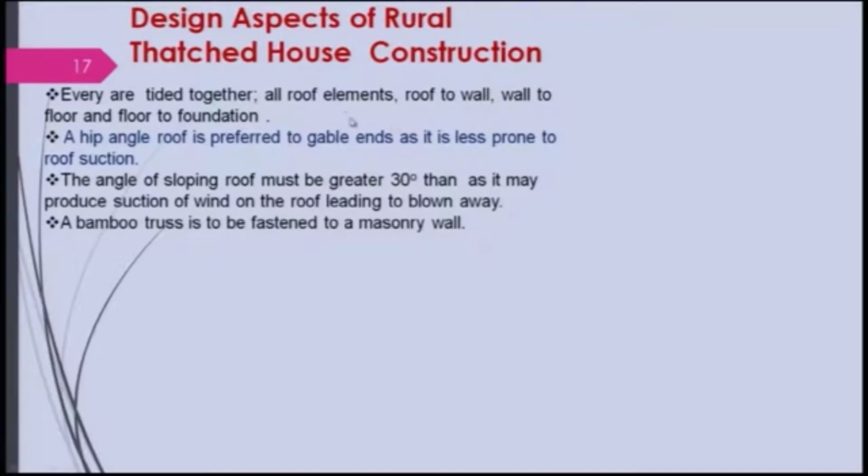This truss has to be connected with the column, and all the roof elements have to be joined together. That is the first important thing, and then the roof has to be joined to the wall and also to the column. In earlier days people used coir rope, and later on people started using iron nails. Again, the wall to the floor and floor to foundation, which is not shown here, are very important and have to be joined, otherwise the structure will not be stable.

Besides this, there are two kinds of roof one can think of: one is the hip roof, and the other is a gable roof. There is an overhang here. Generally the hip angle roof is preferred over the gable ends, as it is less prone to blow off because it is secured very well with the wall, so it will not lift out, particularly when the wind speed is very high.

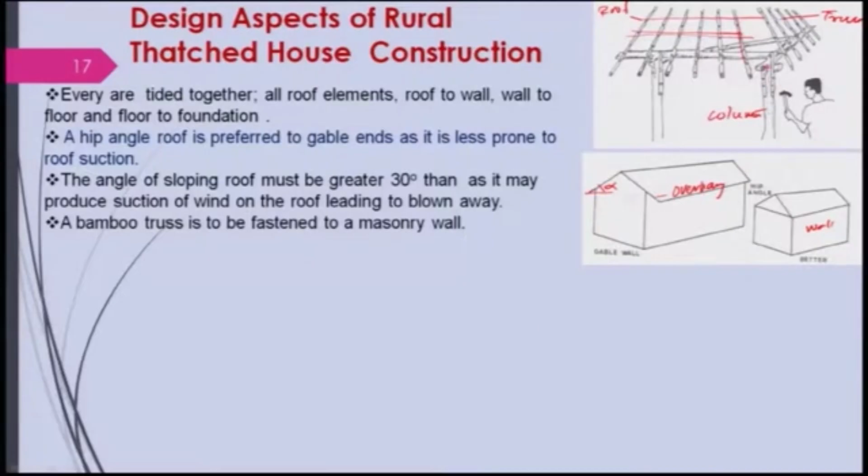Looking at this angle, the slope of the roof must be greater than 30 degrees, as a smaller angle may produce suction of wind on the roof leading to it being blown away. If this angle, let's call it alpha, is small, say 10 to 20 degrees, it is generally recommended that it be more than 30 degrees. The question arises why. Let me try to explain.

Suppose the wind is coming this way at angle alpha to the roof. I can resolve this velocity, V, into components: V cos alpha and V sin alpha. If the angle is small, this velocity V cos alpha will be higher, and then the static pressure on the surface of the roof will be lower.

We can use Bernoulli's principle: P total equals P plus half rho V cos alpha squared. That means if alpha is smaller, V cos alpha squared will be higher, and then the pressure will be lower.

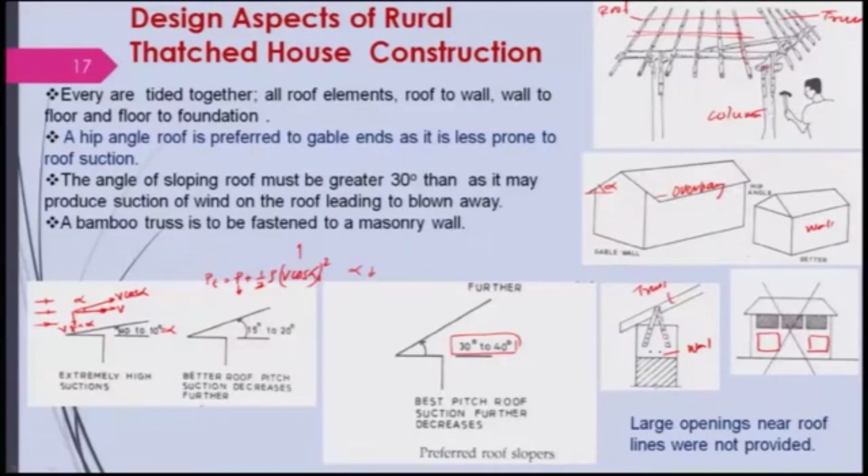These are the kinds of scientific ideas people were having at that time, which you can see today even in remote places. But in modern villages, where concrete and mortar are used profusely, you will not find this kind of concept being implemented, because they do not know what they are doing.

Besides this, there is a ventilation system, which was very important in ancient rural housing, because air velocity created discomfort, particularly when either cold or hot air blows directly onto a person. You might have experienced this yourself. But if it comes tangentially, not directly, you may feel good, provided the velocity is not too high. So that has been taken care of in the house also.

It is important to have fresh air constantly entering the house throughout the year, not only in summer or the rainy season, but in other seasons too. It must also be distributed evenly to minimize sudden temperature changes or drafts in the room. These are taken care of by two ventilation systems found in rural houses.

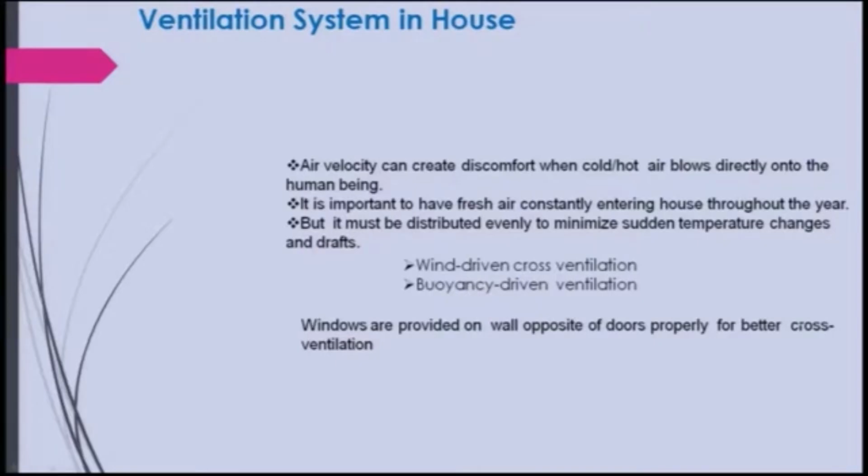One is wind-driven cross ventilation, which you will be knowing, and the other is buoyancy-driven ventilation. For wind-driven cross ventilation, windows are provided on the wall opposite the doors for better cross ventilation. The air can enter through the door, and windows are not placed directly in front, rather in the corner, so that wind enters the room and then flows out.

Sometimes windows are also placed in this portion, so that wind will come over here, depending on the design, so that the velocity will be distributed evenly across the room. This is the system being placed.

Houses were designed in earlier days to take advantage of natural breeze for cooling. Natural ventilation relies on breezes to remove moisture, heat, odors and active gases, which are essential to remove instead of sealing them in. Nowadays people stay in air conditioned rooms that are all closed, and the oxygen level goes down when you close it.

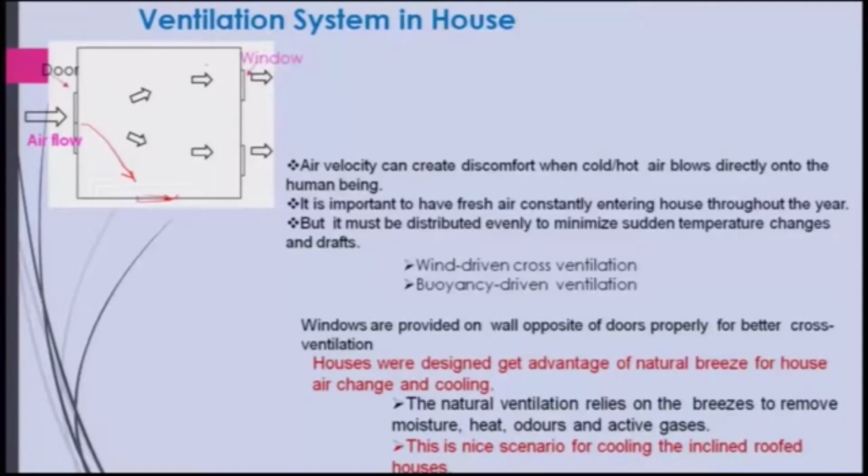We have already seen this nice scenario for cooling of inclined roofs, and why we have thermal effects there, as we saw earlier.

Let's look at a buoyancy driven ventilation system. Air enters here, there is a system of openings, and air comes and goes due to buoyancy, because heat is coming in.

Let me show you a 3-dimensional figure. This is the air entering, and this is the sun's heat falling on the roof. Buoyancy will be created, and the air will go through this vent, pass through, go up, and exit through that opening.

Let me show another figure that makes this clearer. Fresh air enters here, with some recirculation, carrying moisture, dust and heat to some extent, driven by buoyancy. This helps take the heat and dust out, leaving the air very clean.

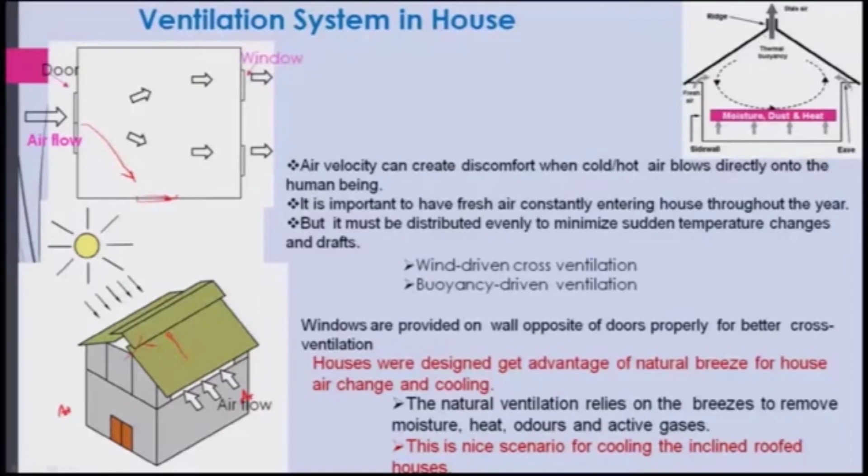So this is a good feature of the inclined roof, which also allows ventilation to be provided. These things were present in earlier houses, but unfortunately this does not prevail today, even though we claim to be very advanced.

There is another thing I observed as a kid when I visited rural areas. I am now trying to relate this attic house design to the solar dryer, which can also be used for cooling the room. Let me show you how it works.

This is the inclined, thatched roof, and this is the living space below. There is an attic portion here with a wooden beam, and a layer of mud on top of it, where grains are typically dried because the heat comes in from above.

The solar heat enters here and dries the grains, which are then used. I remember we used to store a lot of grains here so they would be preserved, and there might be some holes allowing air to circulate as well.

In some places there are openings where such a ventilation system was present. You can find this particularly in some older houses, and it was very effective.

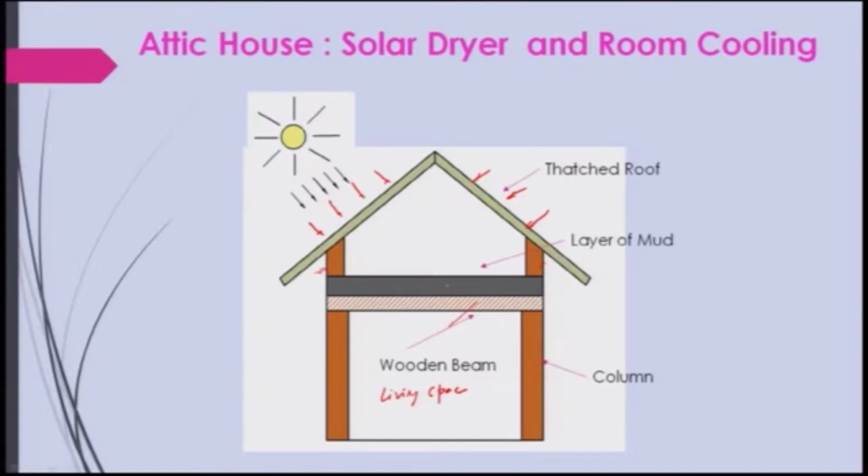In the summer season, this kind of ceiling given on top of the thatched house helps maintain the temperature, keeping it cool in summer. I had experienced this myself during visits to my native village, and it was very good. But you won't find this kind of attic house in villages today, because people are now building concrete structures.

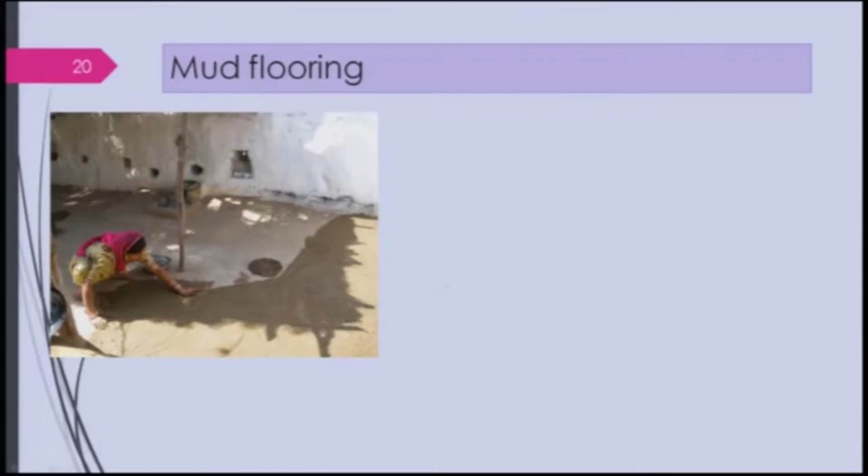Mud flooring is also very important, though it is now rare to see. A woman smears a slurry prepared by mixing cow dung with mud. To do this, one must first soak the floor with water for 2 to 3 hours, but not too much water, otherwise it becomes difficult to work with.

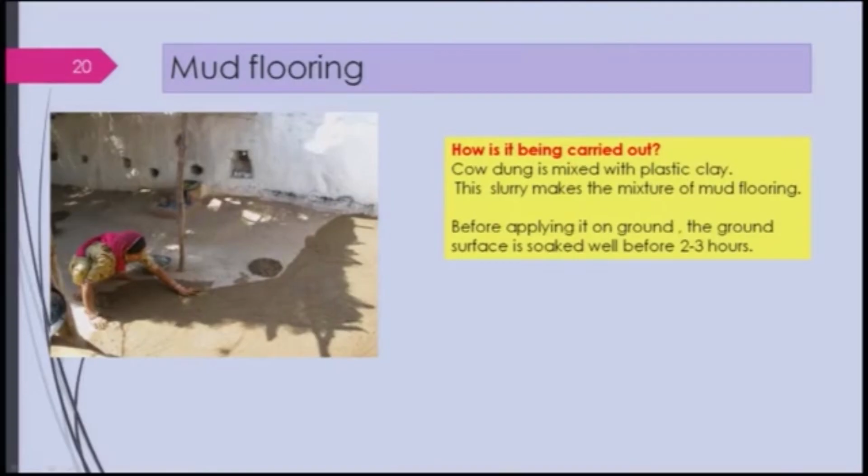That is an art one has to learn. You will have to smear this slurry with either hand or with the help of some brush-like thing made out of cloth. Of course, she is doing it with her own hand.

What are the advantages one may think of? This is free of cost because cow dung is available. It is a part of rural India where agriculture is the main way of living, and it will be cool in summer and warm in winter. It is environmentally friendly, and it disinfects the area due to the use of cow dung.

I had a talk with somebody and they said it is a little controversial. Some people claim the pathogens get decreased because of using cow dung, but others say something different, so one has to be very careful and check it. My gut feeling is that since people have been doing this for ages and were very healthy, I would believe it may disinfect the area. But more research is needed given the present context of natural imbalance. We should not take it as it is; we should check, correct, and verify it before accepting it.

There will be a little waviness, some small ups and downs - it is not as polished as tile or mosaic floors. That helps in giving acupressure to the feet, and it will be helpful for maintaining health, and also you will not fall down there.

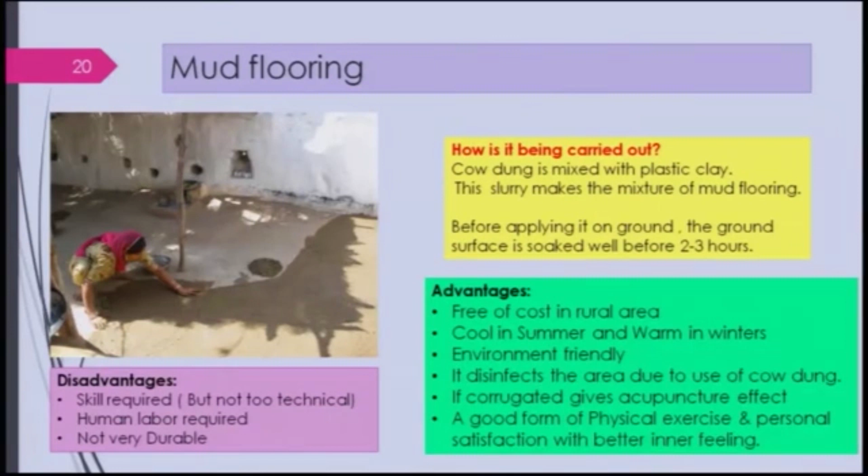Skill is required, but not that technical, and human labor is required - but I will put it the other way around: if you don't do physical exercise, your body will get a lot of diseases, particularly nowadays. It is also not very durable, that is the negative part. But this disadvantage can also be converted into an advantage if you look at it from the proper perspective. This is what our ancestors were doing in ancient India.

We need to look at it, relearn it, and do whatever we can at this moment. I will be showing some of the things people have improvised, particularly the mud wall - I will show how people have improvised it.

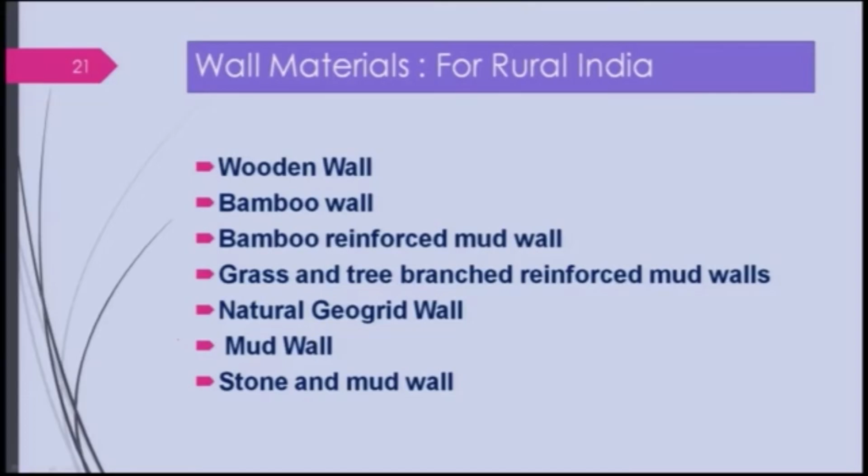People are also talking about natural geogrid walls, and of course I will show you the mud wall a little more, and the stone and mud wall - we will go through and learn a bit about those. If you look at the wooden wall, it is very simple to do; commonly wooden planks are being used, like these wooden planks here.

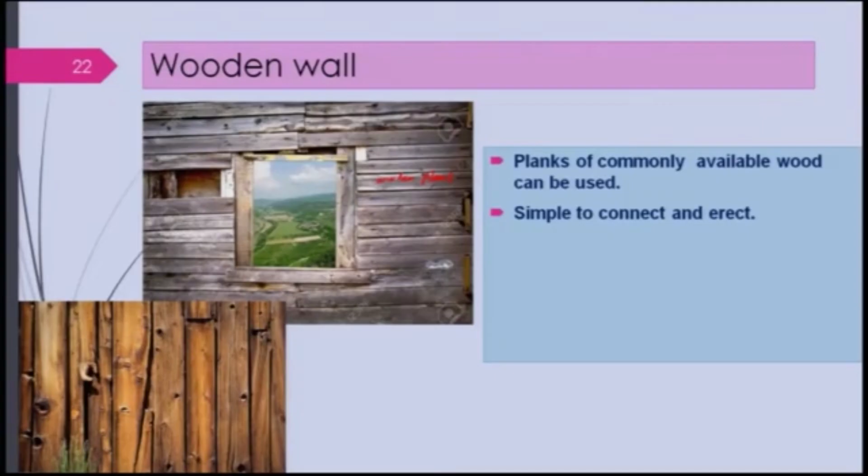Wood comes in different sizes and can be horizontal or vertical depending on the need, and it looks very elegant. In earlier days wood was very much available, but today it is a scarce commodity. It is simple to connect and erect because wood can be joined very easily.

It is easy to handle unlike brick and mortar or other stones. In case of earthquake, wood is very good, nothing will happen, that is why people in Japan use wooden houses. Even in our area, particularly Arunachal Pradesh and the Himalayan region, people used to make wooden houses. And failures, if they occur, will not be catastrophic like concrete and mortar structures.

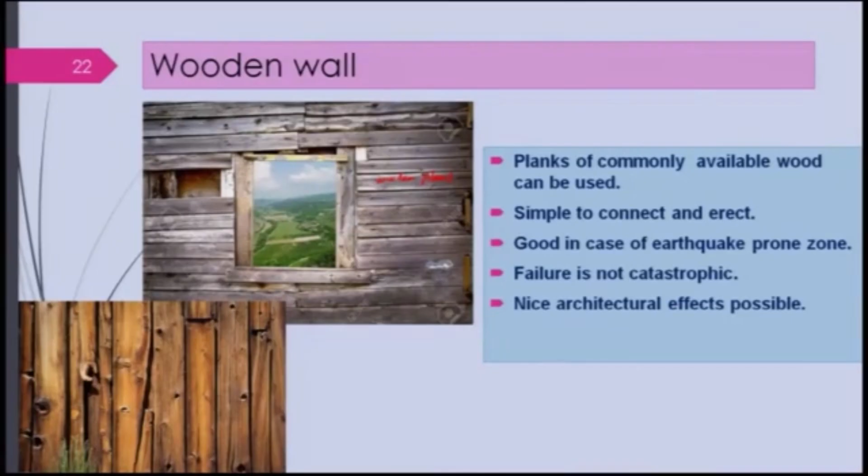A nice architectural effect is possible, because I had lived in a wooden house which was quite good aesthetically. You feel good about it, as if you are with nature. If you love nature, you feel part of it. So that kind of feeling you will get.

But of course, there will be disadvantages also, like more theft cases, with criminal activities going on in our country and other places. So there are a lot of safety issues, and there might be termites or other insects spoiling it, maintenance is a problem. There are several other problems associated with it.

Bamboo, if you look at it, is an extremely strong natural fiber. When I was a kid, bamboo was used left and right, particularly in Odisha, because we were growing a lot of good bamboo, but today it is not as common.

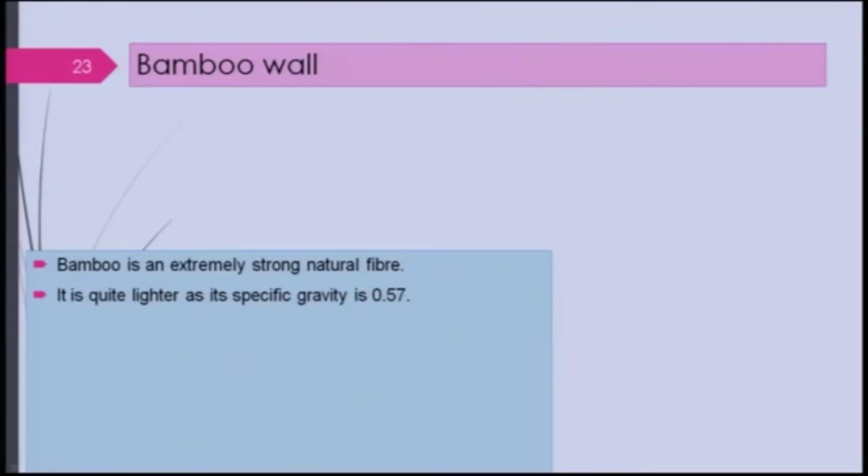It is quite lighter, as its specific gravity is around 0.57 and its average weight is around 0.6 kg per meter, so it is quite lighter, that shows.

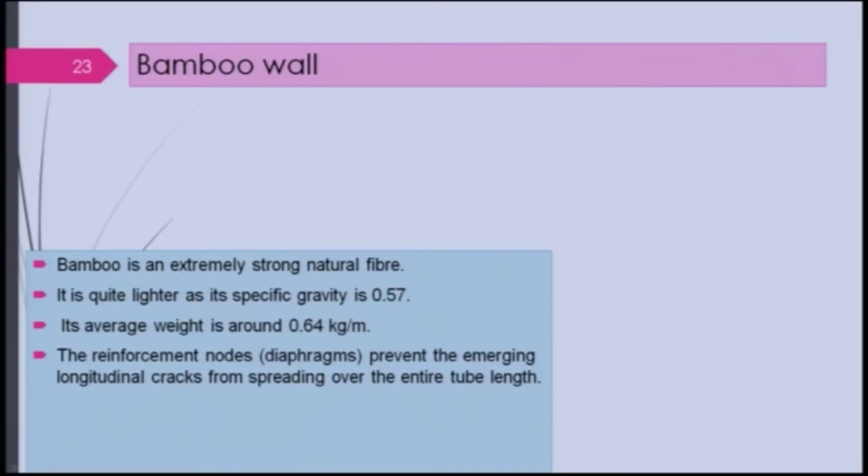A very important thing: the reinforced nodes, like a diaphragm kind of structure, prevent an emerging longitudinal crack from spreading over the entire length. Suppose a crack occurs in the bamboo, it will not spread, because if you look at a bamboo, there will be a diaphragm here, and that will not allow it to spread. This is naturally available, you need not do anything.

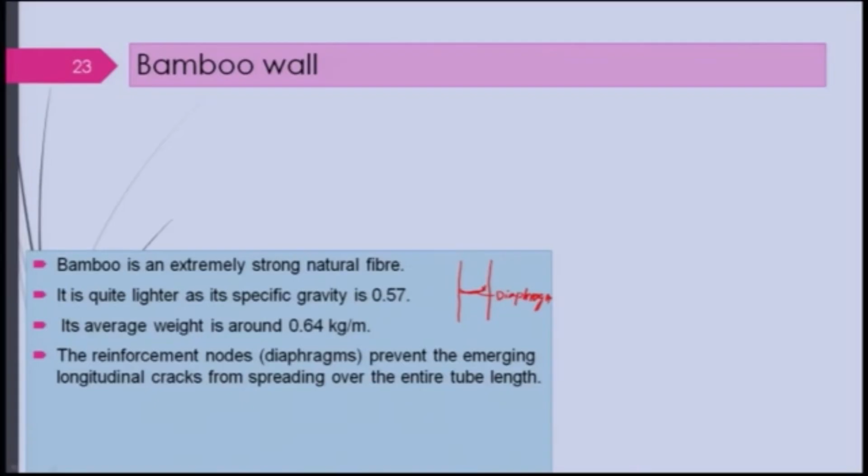It is economical and environmental friendly, and it can be biodegradable and good for Indian seasonal variation in temperature, because there is a lot of temperature difference and bamboo will be good that way.

Of course, if you look at failures which may likely occur, in the history of civil engineering, people never claimed that bamboo is that strong, and still people use it.

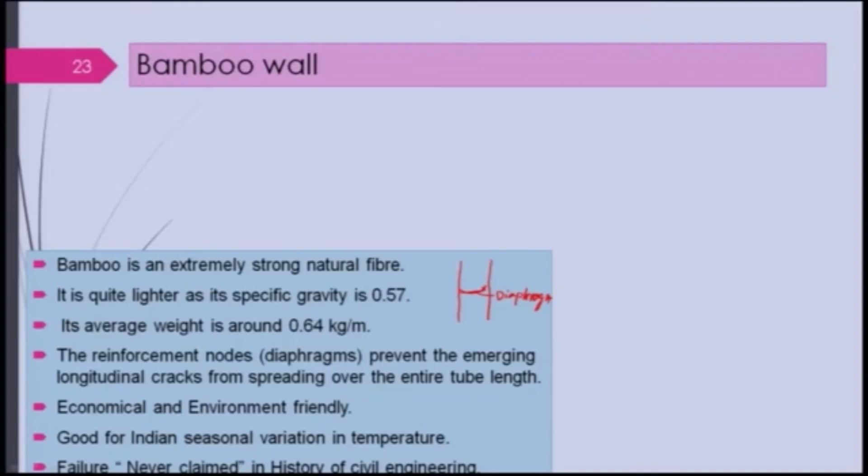Of course, these are some of the data I have just put, and it may vary, but I have given them so you can have a feel, and you can see there is some variation, maybe more variation will be there.

It has good tensile strength and also compressive strength, density is very low, and the bending elasticity is quite high, as is the bending strength. So it is comparable with any other material, and it is far better than wood even. If you look at metal, it can be comparable to some extent.

This is a house, this is a wall one can think of having been knitted, this kind of thing. Even you can think of using dresses out of bamboo. Bamboo textiles are there, you might have seen, people have produced yarn, and this is being knitted.

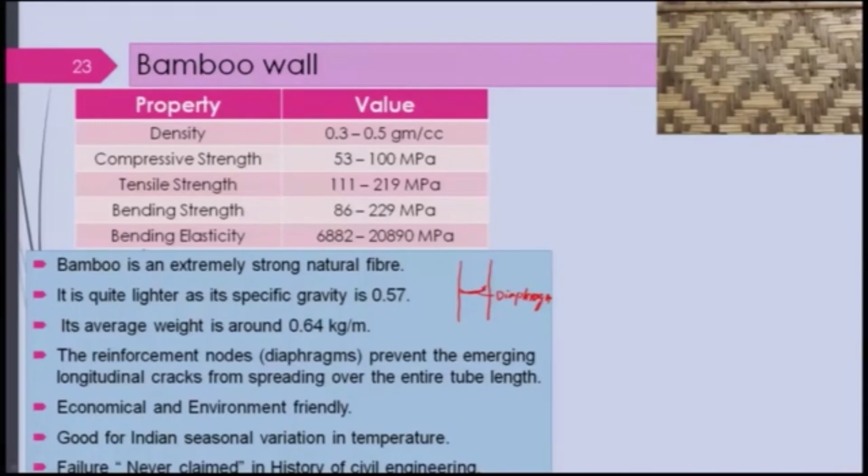And bamboo, if you look at, this is a woven bamboo wall, these are the bamboos being woven properly, one can say without even mud cladding. There is another one, these are the bamboos, and these are being woven like wattle, we call it wattle. Then you can have a plaster, what we call daub, and then you can use it.

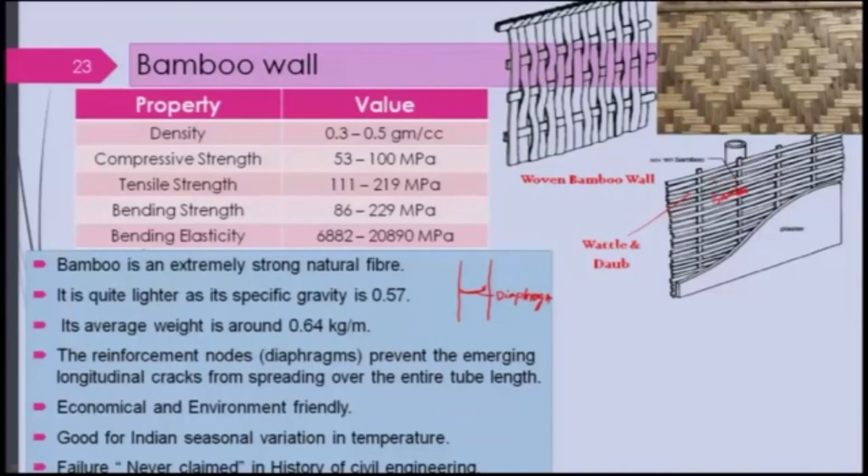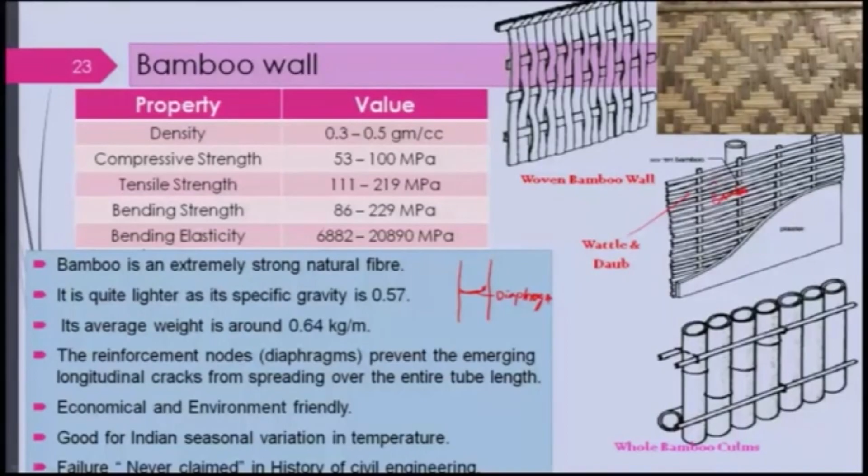I have just shown you a few of them, and I would suggest that you please take some photographs if you come across such structures, particularly in Arunachal Pradesh, Assam and other places where people are still using them. If you could get a picture, that will be nice, because I was searching and could not get actual pictures.